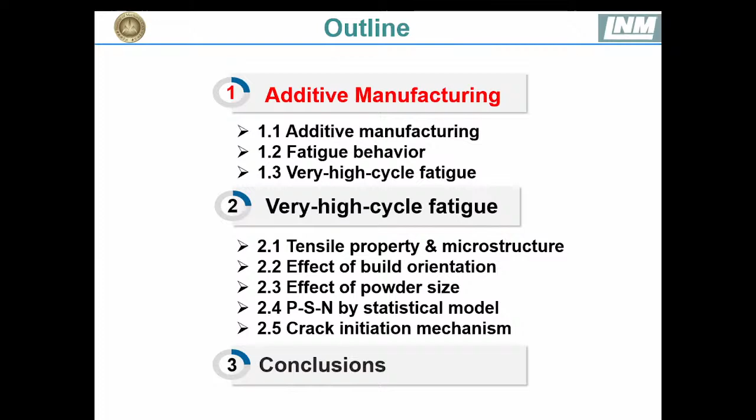As we all know, we are quite familiar with the additive manufacturing process. It is a layer-by-layer manufacturing process driven by three-dimensional CAD and based on the discrete accumulation principle. It has a lot of advantages compared to traditional subtractive processes, such as being a rapid prototyping process with short manufacturing time, the ability to manufacture and repair components with complex shapes, and high cost performance.

Therefore, over the last 20 years, it has been widely used in many industries, such as biomedicine, automobile, and aerospace, among other fields. However, there are also some disadvantages concerning additive manufacturing alloys.

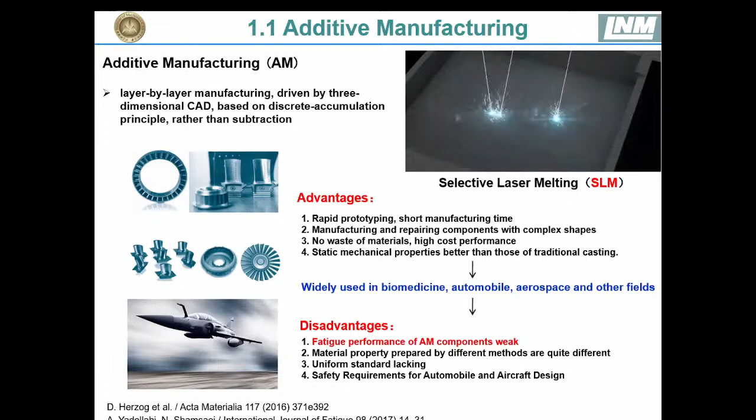One of the main disadvantages is that the fatigue performance of these components is quite weak compared to some others, because during solidification in the SLM process, some cracks and porosity could come out, and this is our aim, to perform a fatigue analysis for this alloy.

Concerning additive manufacturing, there are some scientific problems and also technological challenges, such as defects. There will be a lot of defects, and also the surface roughness of the components could be a problem, and also there will be some residual stress. The microstructure is not uniform, and some new model to predict fatigue life is also needed. And of course, there are also technological challenges, such as the powder characteristics, processing parameters, and so on.

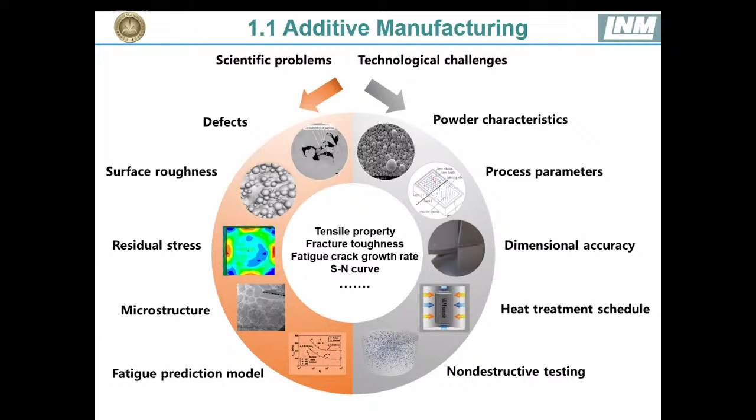Concerning fatigue analysis, our colleague collected some databases for two materials: one is titanium alloy, and the other is aluminum alloy. In these two alloys, we can see there are some factors affecting the fatigue behavior of these materials, such as surface treatment, surface roughness, and hot isostatic pressing, and also a comparison of the fatigue behavior for cast versus printed material.

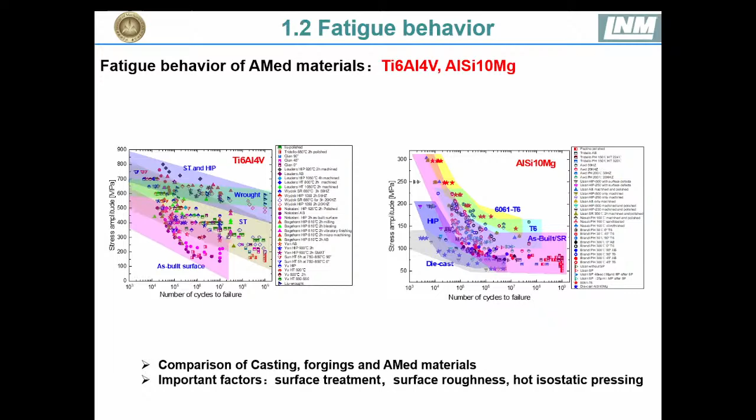Since there are a lot of important factors affecting this integrity, it is necessary to study some of these important factors, and also to develop some models to predict fatigue life. So that's the aim of our study, to study fatigue.

So why very high cycle fatigue? Well, very high cycle fatigue means the fatigue loading is beyond 10 to the 7th loading cycles. This is a new fatigue research area. It can be dated back to the 1980s, and it is important because the mechanism of very high cycle fatigue is different from high cycle and low cycle fatigue.

Normally the crack usually starts from the interior rather than the surface. The other important thing is that now a lot of new engineering components and structures, such as aircraft engines and turbine blades, and high-speed trains, are subjected to very high cycle fatigue.

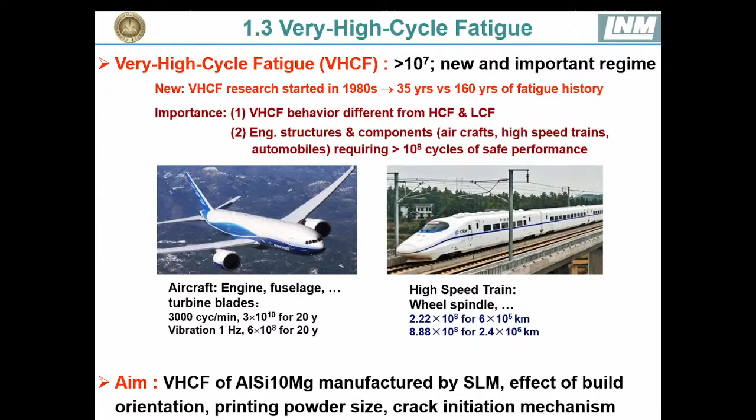So the aim of our study is to study the very high cycle fatigue of this aluminum alloy manufactured by SLM, especially focusing on build orientation, printing powder size, and also the crack initiation mechanism, especially the subsurface crack initiation mechanism.

As mentioned before, in our analysis, aluminum alloy is studied. The chemical composition of this aluminum alloy is shown in this table. This aluminum alloy is manufactured in three different directions: 0 degree build, meaning horizontal build, 90 degree build, and also 45 degree build.

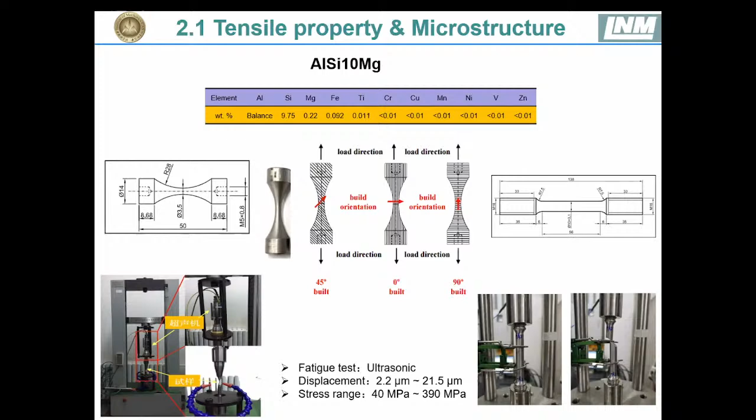The right picture shows the specimen for the tension test, and here shows the result for the tensile test. We can see that the build orientation has a strong effect on the yield stress, ultimate tensile stress, and elongation. The 0 degree build specimen has a higher yield stress and also a higher ultimate tensile stress than the 45 degree build and the 90 degree build.

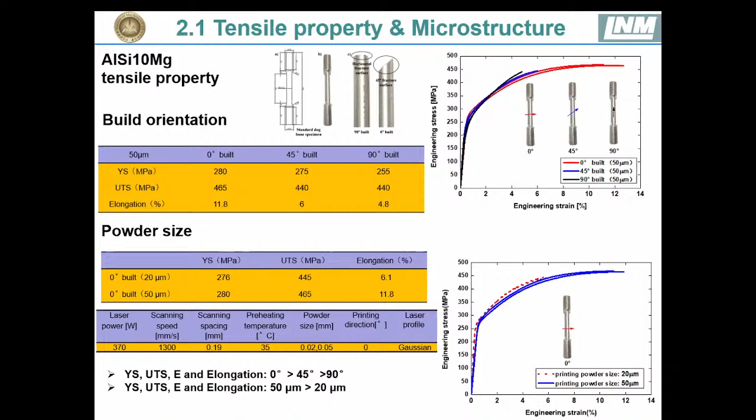The powder size also has a strong effect on the property. We can see that the specimen built with 50 micron powder is higher than that with 20 microns. The reason will be clarified later.

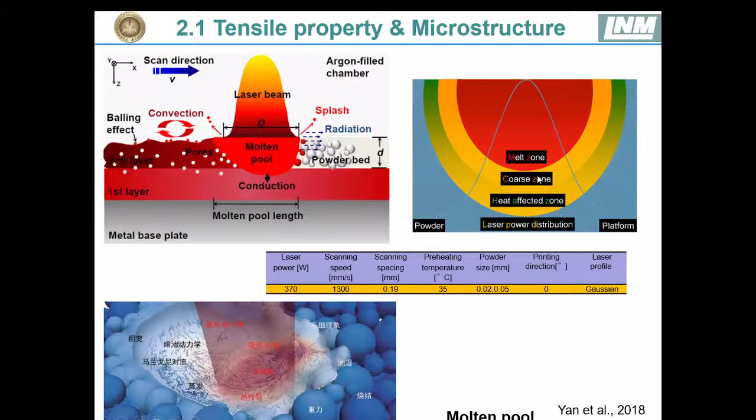We know that additive manufacturing is quite a complex physical and chemical process. There's thermal transfer and mass transfer, and due to this thermal gradient, a molten pool will easily form, because the temperature in the middle of the laser is higher than that at the border, and this will lead to a non-uniform microstructure, which will be presented later.

Due to this anisotropic microstructure, the microstructure is observed by optical microscopy from two different orientations. From this direction, we see a fish scale pattern, which is typically generated by this SLM process due to the thermal gradient. In figure B, we can see some molten pool here.

We can see that some molten pools are sometimes not continuous. This is because the laser sometimes can penetrate different layers and cause them to connect with each other.

And also with others, we can also see this non-uniform microstructure. And by scanning electron microscopy, we can further observe the microstructure.

We can see the microstructure includes 3 different zones: a fine zone, a heat affected zone, and a coarse zone.

And here the microstructure is a kind of cellular microstructure. It includes aluminum and also eutectic silicon is shown here in this structure.

And also it is believed that the silicon in the... please, Zoltan, sorry, Zoltan, can you mute yourself?

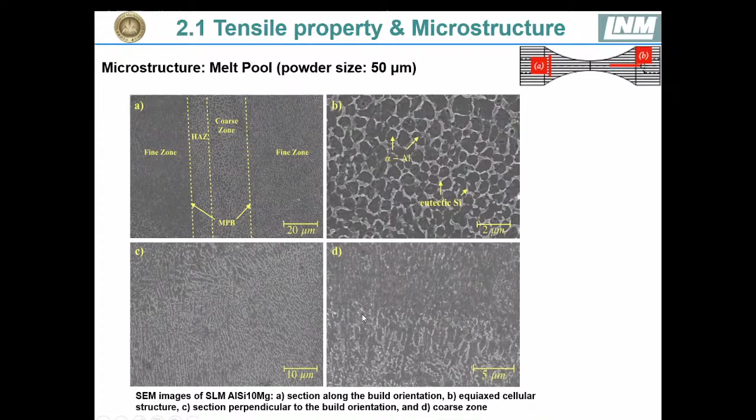And the microstructure is further observed using EBSD here from different orientations, from different angles. We can see that in the direction of the building direction, there are some columnar grains, formed due to the thermal gradient.

And in the other direction, we can see these equiaxed grains, which are formed quite uniformly. And also we can see a texture of 001 is formed due to this solidification process.

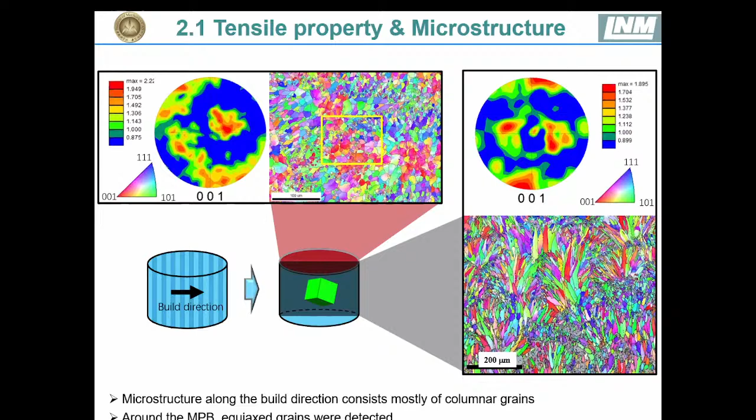And the microstructure is further observed. Here we can see that both columnar grains and also equiaxed grains were observed.

And also we can see some irregular grains, and some defects are shown, most frequently near the molten pool boundary here, as shown in this figure.

And also we can see the distribution of the grain size of this material here.

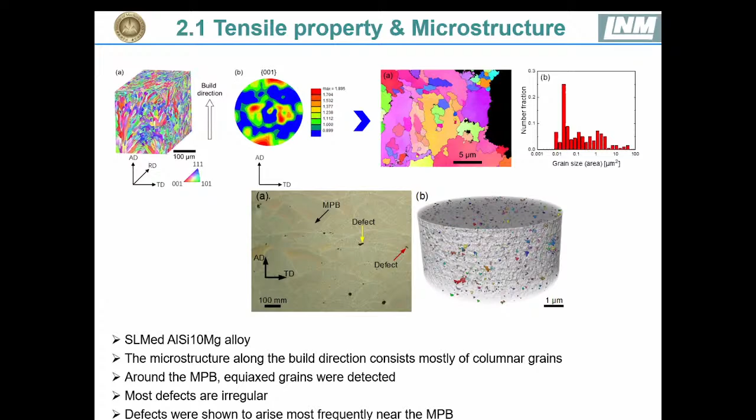And of course, the microstructure for the material manufactured with different powder sizes is also observed and shown in this figure. It can show the distribution of the defect size, and also the distribution of the grain size.

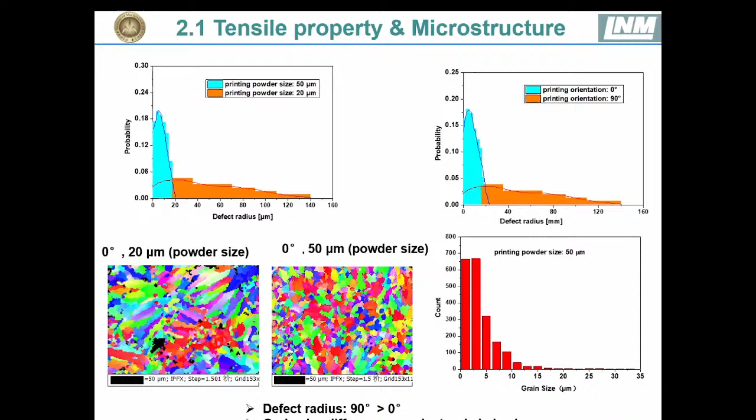And in general, the defect size of the specimen manufactured with 20 microns is larger than those with 50 microns, and the distribution from specimens manufactured at different orientations is also shown here.

Then we come to the very high cycle fatigue property of the specimens manufactured at different build orientations. From this figure, we can see that fatigue strength for the specimen manufactured at 0 degrees is larger than that at 90 degrees.

This is in agreement with the tensile property, which we showed before. And here we can see that the fatigue strength decreases with mean stress—this is the mean stress effect.

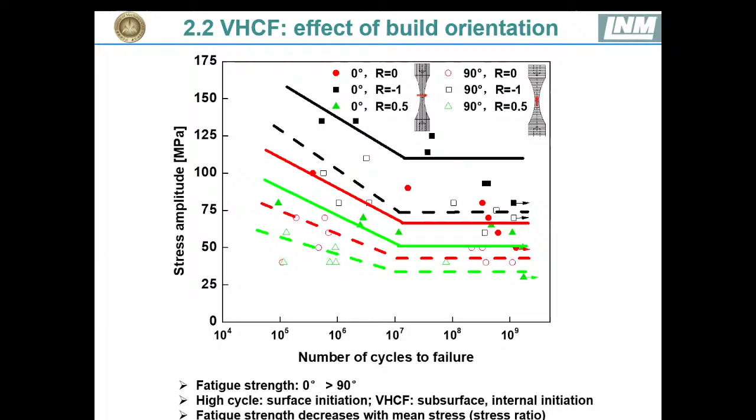This is also in general agreement with common practice, and both surface and subsurface, that is internal, crack initiation will be shown for these specimens here.

And the sphericity and the equivalent diameter of the cracks are also shown here. We can see that the sphericity of the defects decreases with the equivalent diameter, and most defects are ellipsoid shapes with equivalent diameter less than 40 microns.

And we can see that the defects in this material are also analyzed with the Gumbel distribution. We show these two distributions here in these figures.

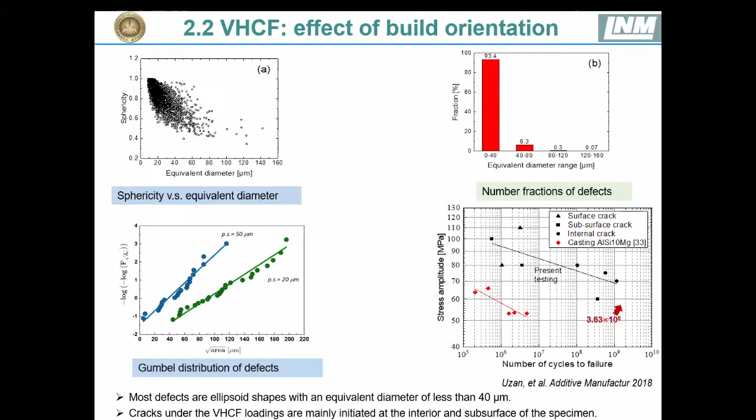And crack and fatigue properties for the additive manufacturing materials are also compared with those of castings. The specimen is shown here also in this analysis.

Then one question may arise: what is the reason for the effect of build orientation on the very high cycle fatigue? Why does the horizontal build specimen have higher fatigue and tensile properties than those built with 90-degree orientation?

One reason can be due to the molten pool shape. We know there are two molten pool shapes: one is layer by layer, where across different layers there will be several layers of molten pool boundary, and when the molten pool is parallel, they form track-by-track molten pools.

We can see when the molten pool boundary is parallel to the loading direction, the molten pool will be difficult to slip. On the other hand, when it is vertical to the loading direction, it will be much easier to slip.

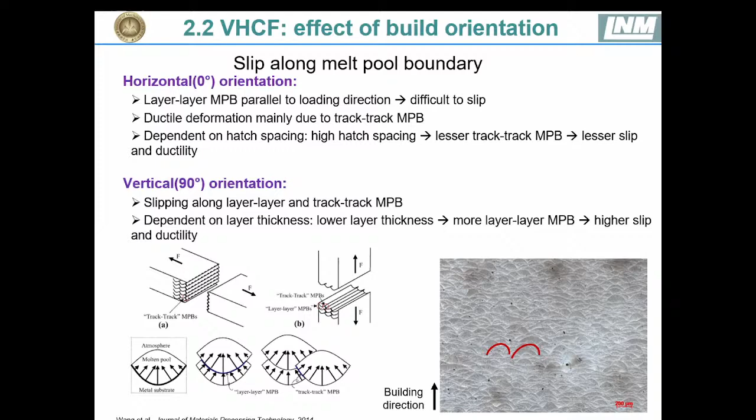So in this sense, for the horizontal orientation specimen, it will be much more difficult to slip, and it takes more energy, so the strength and the fatigue strength will be increased. On the other hand, for the vertical specimen, the fatigue strength is lower.

To be more specific, this figure shows the slip in the molten pool boundary. When the loading is vertical, we can see the molten pool will be much easier to slip. On the other hand, when the loading direction is horizontal, it will be much more difficult to slip.

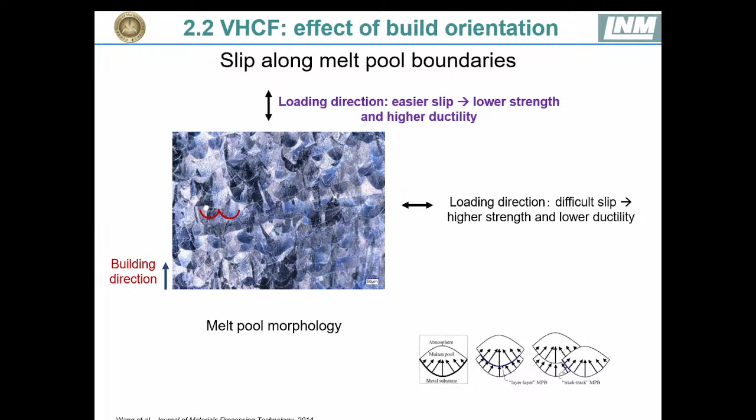This will lead to higher strength and lower ductility. This is one interpretation of the effect of build orientation. The other interpretation comes from the stress concentration effect.

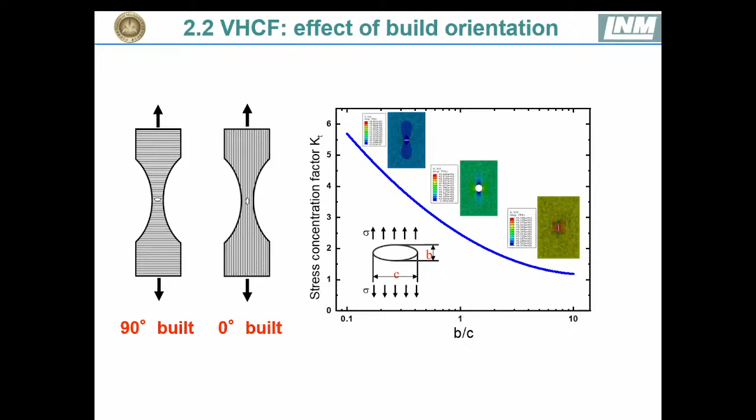For the zero-degree build specimen and the 90-degree build specimen, we see different morphology, and the stress concentration is different. We calculated the stress concentration factor and demonstrated the difference between them. For the 90-degree build specimen, the stress concentration factor is much higher than those built horizontally. This also explains the effect of build orientation on fatigue and tensile strength.

In addition, we also observe crack initiation using scanning electron microscopy. Five types of crack initiation modes are classified. One is crack initiated from the surface, which may be due to surface roughness or other surface features. Cracks may also start from subsurface or internal defects, lack of fusion, and pores, as shown in these figures. Also, cracks initiated from internal defects finally grow and form a fish-eye pattern, shown in figure C.

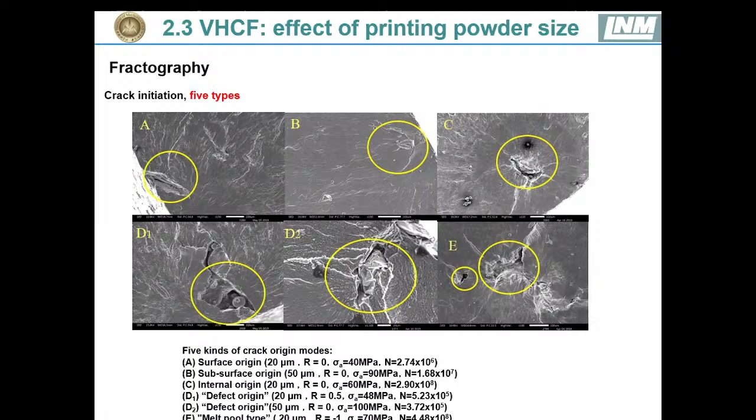We can also see that cracks may start from the melt pool, shown in figure E, and several multiple cracks could also be found, as shown here in figure E. These crack initiation modes are somewhat different from those in traditionally manufactured specimens. Fracture mechanics analysis will be used to study crack initiation and propagation.

Here we studied crack initiation and calculated the threshold stress intensity factor magnitude. We can see that the threshold for crack initiation is quite constant, corresponding to the threshold of the material, while in the propagation zone the threshold stress intensity factor increases with crack area. This means that mean stress may play a role in crack propagation.

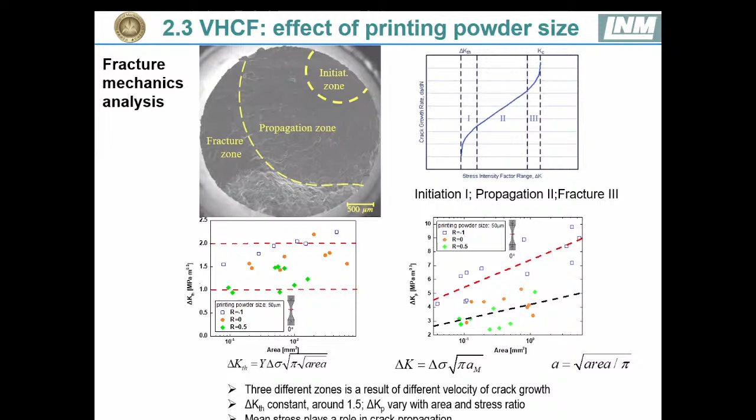In order to study fatigue strength, the Murakami model is used. This is a traditional and widely used model to predict fatigue strength. It correlates fatigue strength with Vickers hardness, the square root area of defects, and the stress ratio. For both surface and internal crack fatigue strengths, the Murakami model predicts quite well, with results showing good agreement with experimental results.

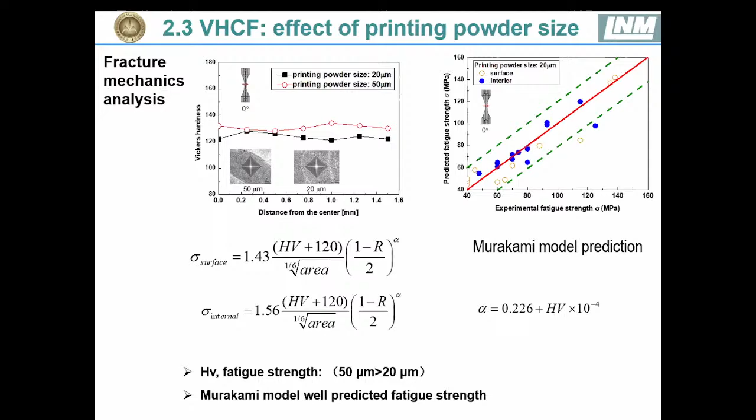In addition, a statistical model developed by our collaborators Andrea and Davide is used to perform statistical analysis of the SN curve. It assumes that fatigue life follows a log-normal distribution. From surface to subsurface crack initiation there is a transition, resulting in two curves, which can be modeled by assuming the mean value of fatigue life follows a log-normal distribution.

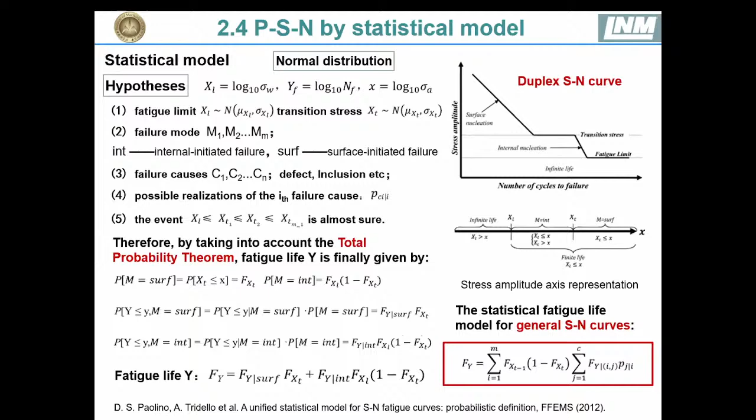This is also a function of defects in the specimen, and the defects are assumed to follow a Gumbel distribution. Once we have the distribution of defects, the fatigue analysis can be done. We assume a monotonic linear decreasing model for this fatigue analysis, and then the PSN curve is analyzed for different conditions.

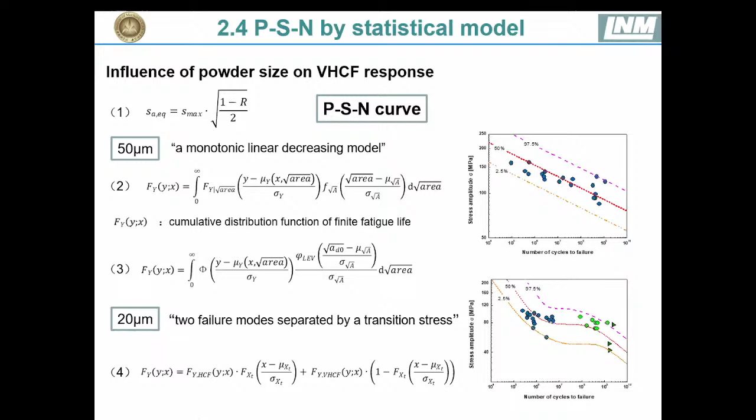The failure probability SN curve is clarified here, and if we consider two failure modes separated by a transition stress, a stepwise SN curve is shown here in this figure. We can also clarify the different failure probabilities from these SN curves.

Using this method, the PSN curve allows us to estimate the fatigue strength when the fatigue life equals 10 to the 9th loading cycles. Here we can see the distribution of the fatigue strength for the two printing powder sizes.

With this method, we can also obtain the result of fatigue cumulative failure probability with fatigue strength. We can see that as fatigue strength increases, the failure probability also increases. This is also in agreement with our common practice.

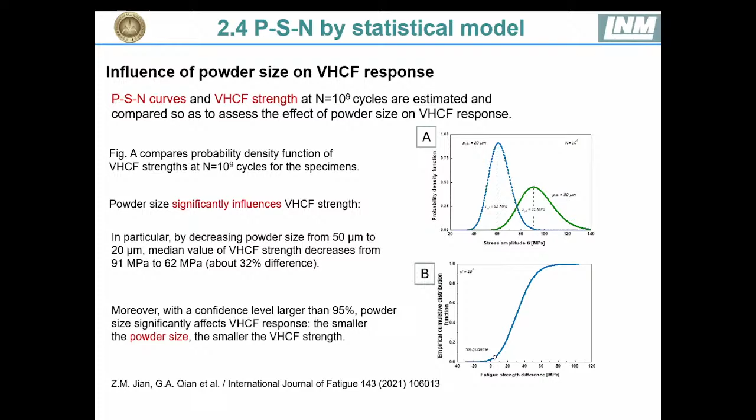In the next part, we will discuss crack initiation mechanism. As we know, crack initiation in very high cycle fatigue normally starts from internal cracks and will form FGA morphology. What is the mechanism of FGA? There are some discussions here, and one reason is assumed to be hydrogen, and there are also some other models.

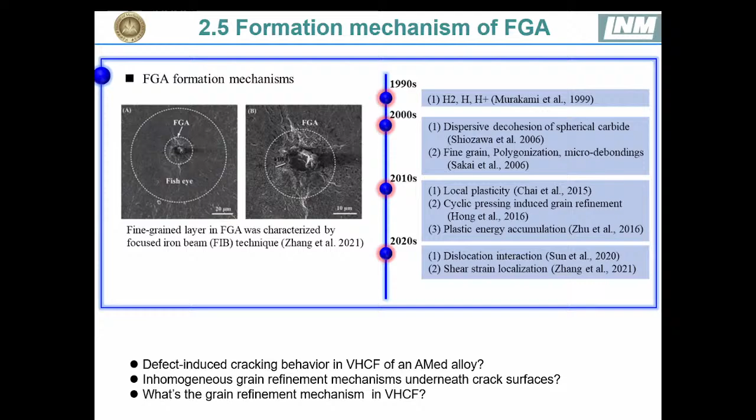According to my colleague Professor Hong, it assumes there's numerous compressive loading, and this kind of model is now widely used in traditional manufactured materials. However, for these additive manufactured materials, what is the mechanism, and what is the grain refinement mechanism in very high cycle fatigue?

We come to this crack initiation mechanism. According to this numerous cyclic pressing model, it assumes that the crack initiates, then crack contact occurs, and the compressive stress due to cyclic loading will, after some amounts of loading, cause grain refinement. This is now already validated by some experimental observations.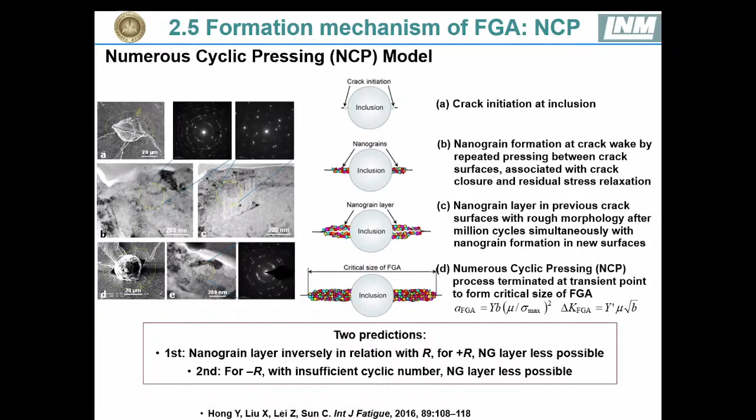Here in our analysis, also for this additive manufacturing analysis, we can observe some nanograin size at this crack tip and within the fish eye, within this FGA area here, as we show in our analysis.

We can also see that the crack initiated and mainly propagated along this melting pool boundary, and finally led to failure.

In order to validate the contact stress, we also use our model to study the contact stress between these two crack surfaces during high cycle fatigue.

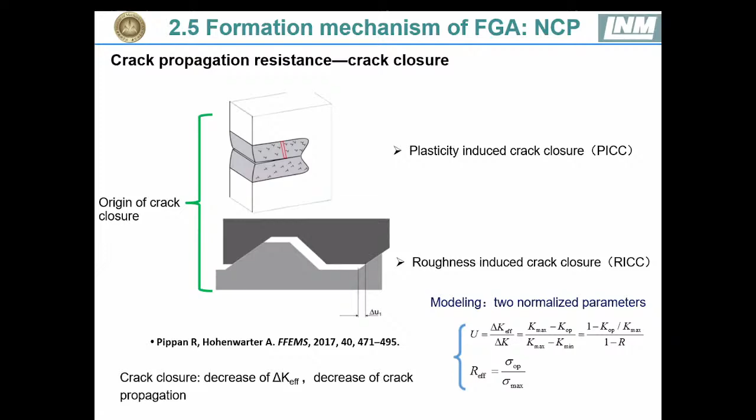Here we assume this plasticity induced crack closure, and we assume the nonlinear hardening material will be used to model this Bauschinger effect, and also used for building the nonlinear effect of the constitutive modeling here.

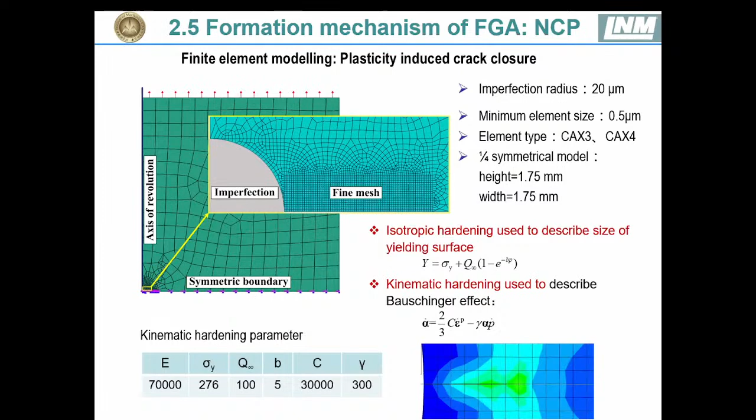Using this model, we ran several cycles and tried to analyze the contact stress, and we can see that the contact stress in the crack surfaces will increase with the decrease of stress ratios.

The contact stress is also quite high, and this high contact stress may lead to grain refinement. This partly validates the NCP model, that is, the effect of contact stress causing grain size refinement.

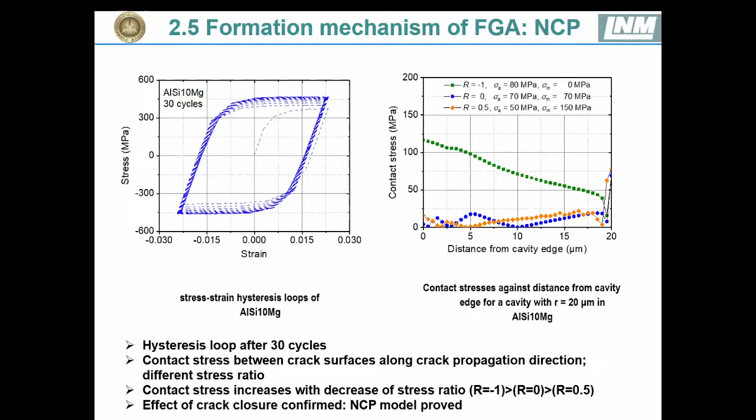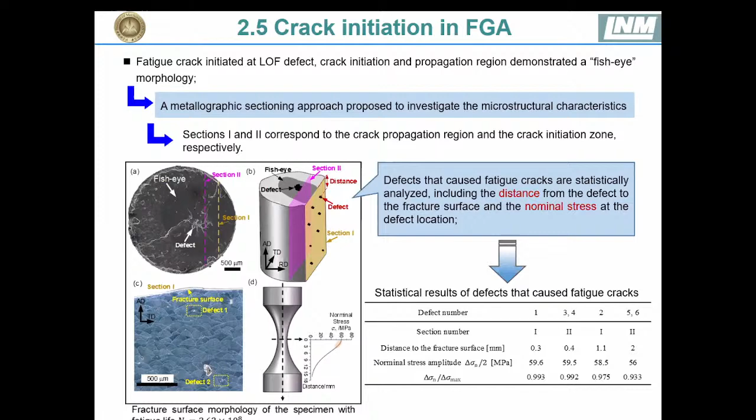In addition, the internal defect-induced crack is also observed here in this analysis, shown by SEM at different sections. We found some different cracks, secondary cracks, and also performed statistical analysis, which are listed in Table 1. Later on we will do some analysis on Table 1.

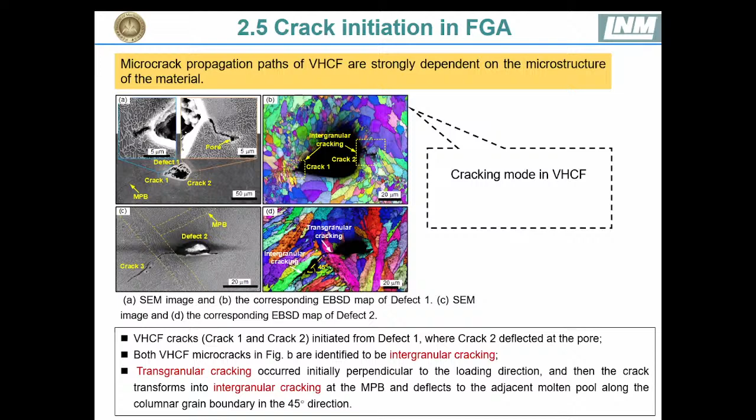There are also defects, there's also transgranular cracking occurring initially perpendicular to the loading direction, which then transfers to intergranular cracking in the melt pool, leading to 45 degree directions here. In figure 1, we show two defects near the melt pool boundary.

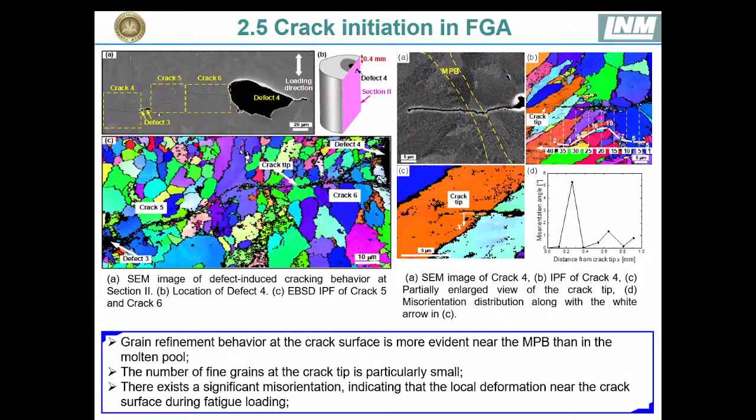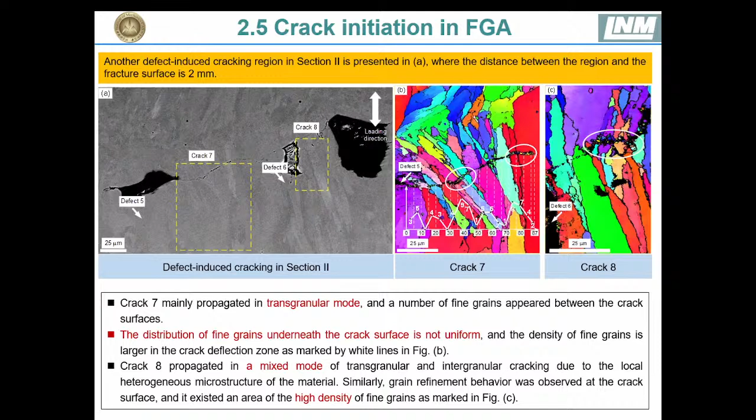In this pore, we also show some columnar grains around the cracks. It shows the fine grains have a higher local distribution in the marked area. Crack 8 is a mixed mode of transgranular and intergranular cracking due to the local heterogeneous microstructure.

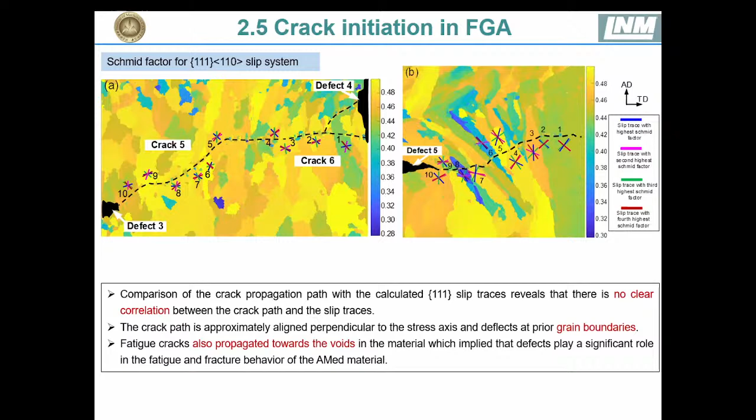Fatigue cracks also propagated towards the void in the material, which implied that defects play a significant role in the fatigue and fracture behavior of the AM materials here.

The grain refinement in very high cycle fatigue is also a new angle boundary formation mechanism. The misorientation angle between fine grains and the matrix is analyzed, and we can see there exists certain misorientation between the fine grains and the matrix grains. It is reasonable to believe that this misorientation exists, and the angle tends to be between 45 and 50 degrees.

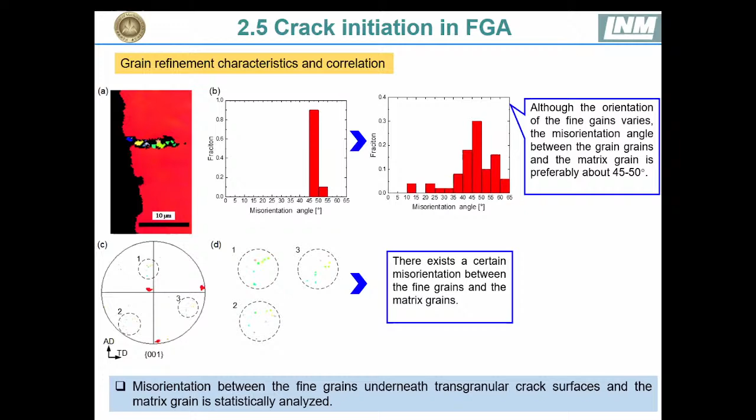The fracture surface after about 10 to the 9th loading cycles is observed by SEM, and this specimen is further observed by TEM and TKD.

The figure on the right shows there's a fine-grained layer near the crack surface, and significant misorientation was also observed in the fine grains. This indicates that the activation at this location is the result of coordinated plastic deformation, and dislocation activations form subgrain boundaries lead to misorientation. As plastic deformation accumulates, dislocations pile up, causing the formation of large angle grain boundaries.

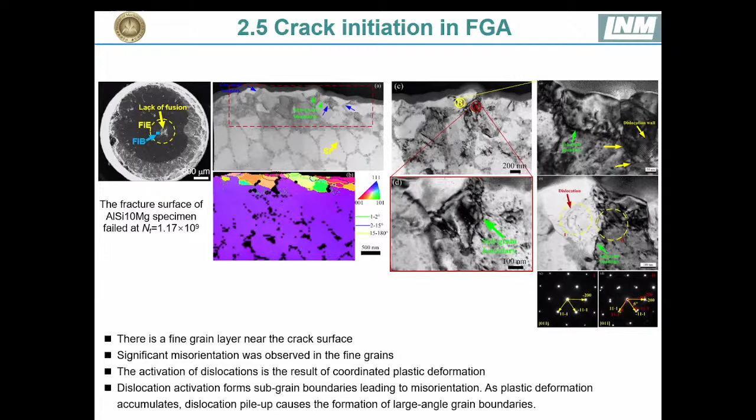This shows the crack initiation mechanism, as well as the formation of the fine granular area in very high cycle fatigue. So from what we've discussed, the following conclusions are drawn.

Firstly, the build orientation has a great effect on the mechanical and fatigue properties of these additive manufacturing alloys. The horizontal manufacturing specimen has a higher strength than the 90-degree manufacturing specimen, and 50 micron printing powder size leads to a higher fatigue strength than that of 20 microns.

Five different kinds of crack initiation modes are identified, and a statistical model is used to perform P-S-N study. As a result of heterogeneous microstructure, intergranular cracking induced by incomplete fusion defects is the dominant failure mode.

We also stress that numerous cyclic pressing (NCP) is the dominant model to induce grain refinement, and the heterogeneous distribution of refined grains underneath the crack surface is strongly related to the printed microstructure and the crack propagation path. With that, thank you very much.

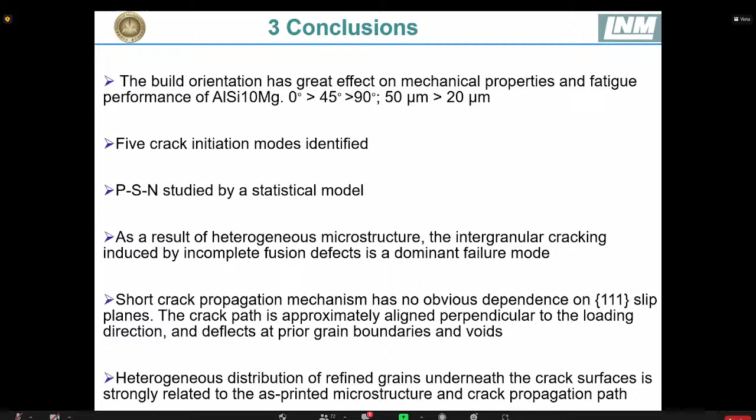According to your results, it seems that the defects are most critical. Do you see ways to modify the process in order to reduce such defects? Meaning, changing parameters or modifying the SLM process in order to get rid of some of those defects?

Yes, especially in very high cycle fatigue, because when the loading cycle is longer, defects play a more critical effect on the fatigue behavior. In very high cycle fatigue, small cracks and also some cracks in the interior of the material will function. Small internal cracks, and also porosity and lack of fusion, will start to initiate, and even multiple cracks will initiate simultaneously, leading to coalescence and failure. That's our experimental observation. So I totally agree with you that defects are very critical in the very high cycle fatigue behavior.

Let me add. Okay, the work is about the analysis of the experimental and numerical behavior of lattice structures manufactured through AM processes. The aim of the work was to select the best performing lattice cell among 5 possible structures, and then to implement an efficient numerical model to predict the behavior under compression, quasi-static tests, and also impact tests.

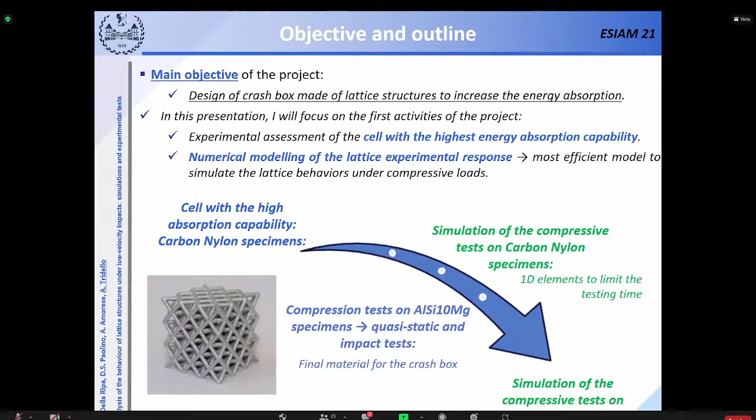The first validation and numerical prediction was performed with carbon nylon material, produced with this Ultimaker manufacturing equipment. We then ran quasi-static compression tests and also numerical models, and we found that the best choice for the lattice cell was the lattice cell number 4.

The prediction with numerical models was quite good and also efficient, since we simplified the model by using 1D elements and an elastoplastic behavior. We got a very good agreement between the quasi-static compression tests on the cell and the numerical model, as for the force displacement curve and for the failure modes, as visible in this slide.

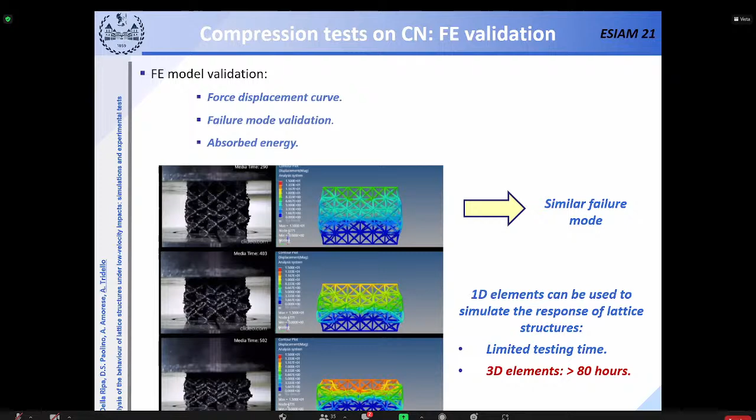Then we decided to implement the cell structure with an AlSi10Mg alloy made through SLM. We had to slightly modify the model to add another constraint to the failure mode, to get an acceptable agreement between numerical and experimental behavior under quasi-static compression tests.

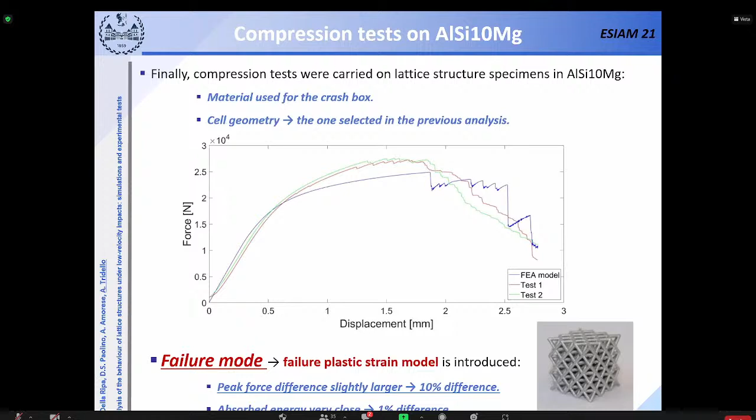Then we ran impact tests on AlSi10Mg specimens, and we found that a significant strain rate effect was present, and this had to be also modeled to correctly predict the maximum impact absorbed energy.

The final results were quite good in terms of final values of absorbed energy, but the shape of the curves is not so in agreement. This is why further developments are necessary for the model to correctly predict what happens with AlSi10Mg metallic alloys, and this is the further development we are pursuing.

To conclude, I think that what I said is already present in the conclusion. Thank you.

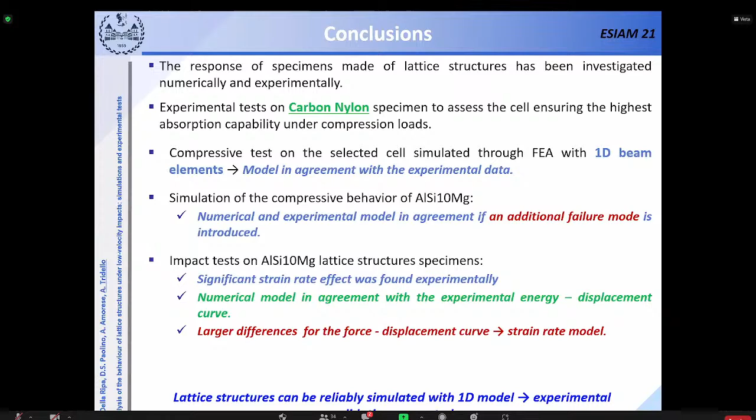The work was really nice, and also the part where you showed the verification of your numerical simulation, it was quite nice and quite matching. I was wondering, for the mechanical properties that you put as input in your model, how were they calculated?

Yeah, we ran quasi-static tensile tests on specimens in carbon nylon, and we got the stress strain curves, and then we implemented the real curve, the actual curve, in the model, so that it's a specific model for that carbon nylon specimen and material. This, in our opinion, was the best way to catch the complete behavior. We didn't model the anisotropic behavior of the carbon nylon, but we got good results in terms of modeling.

This is why we didn't get too much into the detail in modeling the material behavior. Usually when fabrication is done properly with good infill, anisotropy is quite limited in different directions when printed with FDM. How about the dimension of the specimen that you tested? Because these lattice features are quite small.

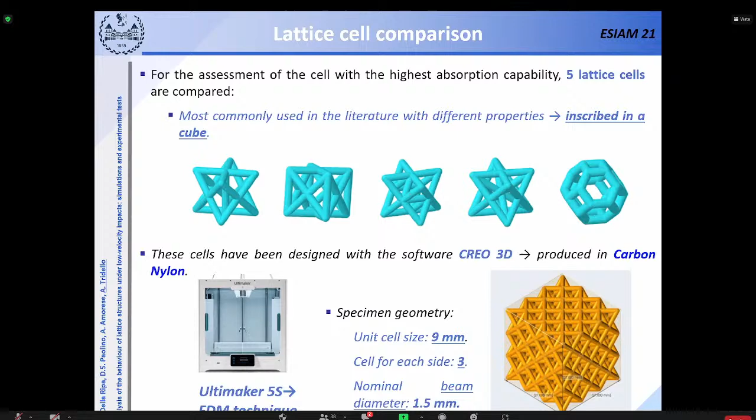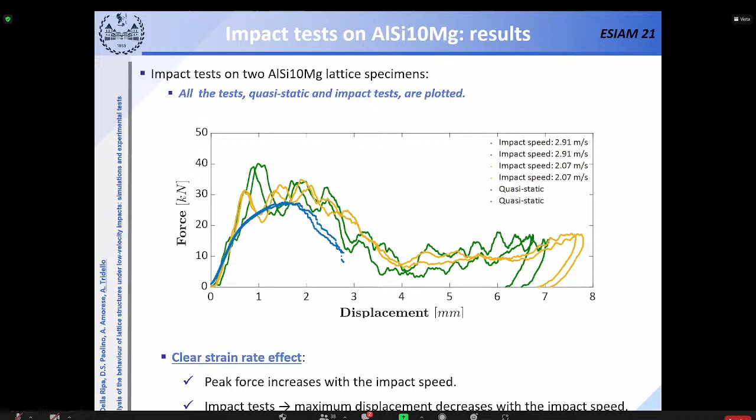And the last question: how about the material properties when it comes to rate dependency? Did you perform any more testing to get the material properties? We ran tests at three velocities, with 2 repetitions each, and put in the model, in the Johnson-Cook model, the values we got with these three values of velocity. Finally we got something in quite good agreement in terms of absorbed energy, but the part related to the aluminum alloys has to be developed a lot, since I cannot say we got good results in terms of modeling.

So for material properties, you repeated the tensile testing but at different speeds. Okay, yeah, perfect, thank you so much.

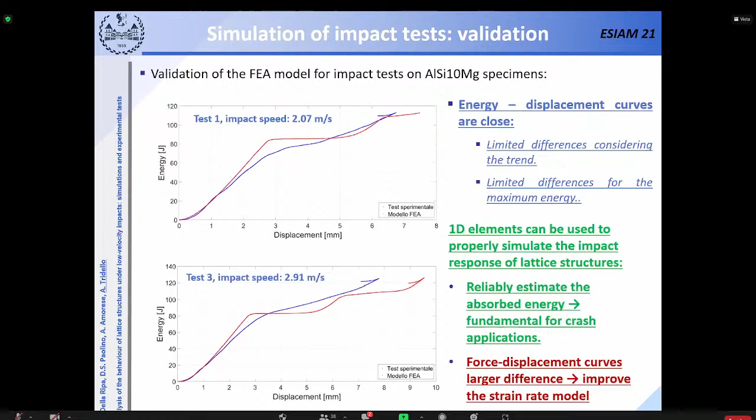The title for the next presentation is Fatigue Assessment of Laser Beam Welds between AlSi10Mg AM-structures and conventionally manufactured aluminum, by local approaches. The research is presented by Mr. Benjamin Möller.

Good morning everybody. I also prepared one condensed slide which I'd like to share. So if you can see my screen now - this work starts from the question: what happens if we join additively manufactured materials, in this case aluminum-silicon-magnesium, with conventional aluminum materials, which we might use for larger structures in the automotive industry, for example.

So therefore we set up an experimental and numerical test program using lap joints, which are laser beam welded between additively manufactured material in the upper part and conventionally manufactured aluminum 6082 in the lower part. We had a test program with fillet welds and welds which run through the two materials.

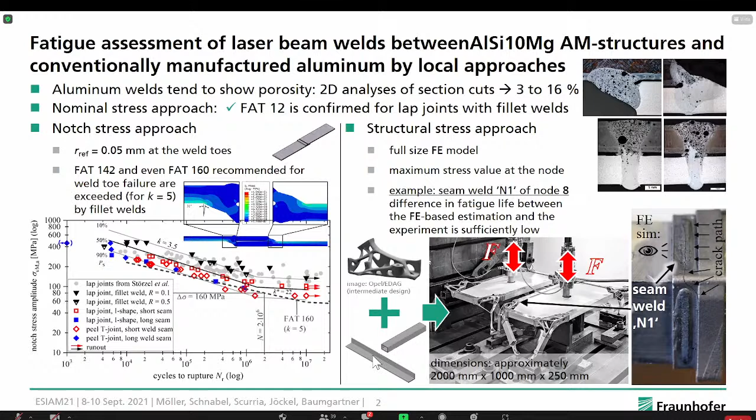In a second step, there was a so-called battery carrier, used in the automotive industry for electric cars, as a component where additively manufactured connection nodes are welded to conventional aluminum sections. This was tested under biaxial loading conditions comparable to the application. In these experimental investigations, we found cracks in at least 3 out of 7 experiments, running through the laser beam welded seams, causing failure of these more or less complex structures. From the numerical point of view, the notch stress approach is not applicable due to these full size models, so a structural stress approach had to be chosen, which was in good agreement for the whole battery carrier to estimate the fatigue life of such a weld seam.

Yeah, this is more or less the outcome of the work, and I think there is still some work to do. So thank you, and I'm open for questions.

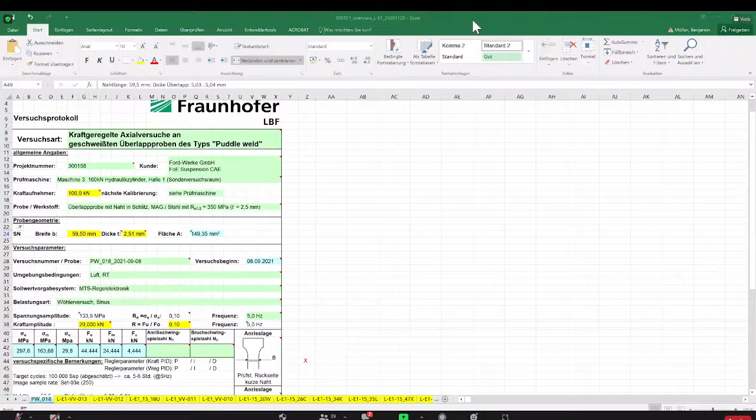Thank you for your presentation. It indeed has been a topic of research lately about welding these complex parts that we fabricate with AM to the conventional part, because usually we don't need to fabricate the whole component by AM. So it was quite interesting to see your finding. Let's see from the audience, is there any question?

Okay, I have 2 questions. One is about the defects you saw, the internal porosity. In the presentation, you mentioned that these defects are more in the welded area closer to the AM part, and as the cause, you mentioned it's because of remelting of the AM side of the joint. Why do you think these large defects are created when the AM part is being melted, but not when the conventional part is melted?

Yeah, we did a little study on this, trying to decrease the large pores and porosity in this area by preparing the sheets in advance of welding, through etching and mechanical removal, in order to try to get rid of the oxides which might come from the outside. But obviously this was not the main reason why we see this porosity, so from our point of view, the reason has to be inside the AM material. We think the porosity which already exists in the AM material, due to the additional heat input, causes this extension of pores and porosity.

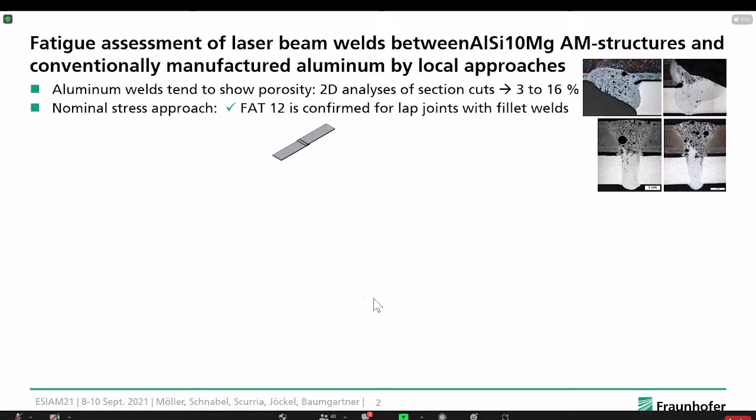Yeah, we also made some trials on this, and we have seen that we got more problems, let's say, changing or flipping this around, since the conventional 6082 material is also not too easy to weld, so we struggled with this material when we flipped it around. So this was the more practical choice in this case.

So we have cracks in case we flip it around, or more tendency to have cracks in the conventional material? Okay, yeah, thank you.

And sorry if I interrupt, can I ask a second question? After the welding, the laser beam welding, do you apply any heat treatment on this stacking of the two plates? No, after the welding there was no heat treatment. We had a heat treatment in advance for the AM material, which was the stress relief heat treatment, and for the conventional one it was a T6 heat treatment. But afterwards, there was no heat treatment performed.

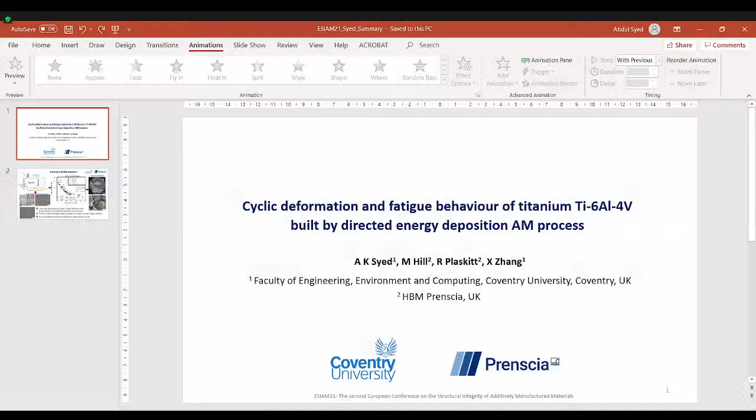Hi, hello, good morning, everyone. Can you hear me clearly, Jawad? Yes. Yeah, please, thank you very much. Introduction. Yeah, okay. Thank you very much for the introduction.

Today, I'm going to present strain control fatigue behavior of titanium alloy Ti64 built by wire and arc additive manufacturing process, which is a directed energy deposition AM process. As we all know, application of AM built materials in heavily loaded structural applications always needs to be assessed under cyclic loading conditions. Therefore, we focus this research mainly on understanding the strain control fatigue behavior of wire arc Ti64 built materials.

So this is just showing a summary of the overall research we have conducted. We have used a wire and arc additive manufacturing process with Ti64 as raw material. And we build these materials using an oscillation build strategy developed for this process. So basically, in this oscillation build strategy, you could actually oscillate your wire and the torch along the wall thickness direction, where the travel direction is along the wall length direction.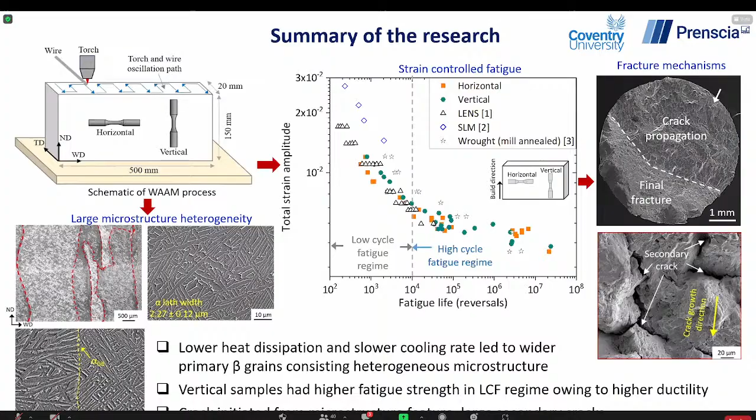The material was fabricated with wire arc additive manufacturing, and this technique, same as other AM techniques, would result in residual stresses in the component. I didn't quite find any info regarding the residual stress in the samples that were studied. Obviously, all the mechanical properties you're observing now are not only related to the microstructure—there is a part that is the effect of the residual stress. What is your opinion? What do you think is the state of the residual stress in the horizontal and vertical cases, and in which case can it be more dramatic?

That's a good question, Jawad. We actually did a parallel program to understand the residual stress behavior when we remove the wall from the substrate, and also after extracting some dog bone samples and compact tension coupons for the fatigue crack growth testing. We observed that after extracting these small samples, around 10 millimeters in diameter, compared to the size of the wall which is 500 millimeters, there are very low residual stresses, actually very close to any technique's resolution—for example, around 10-15 megapascals in terms of the overall residual stresses.

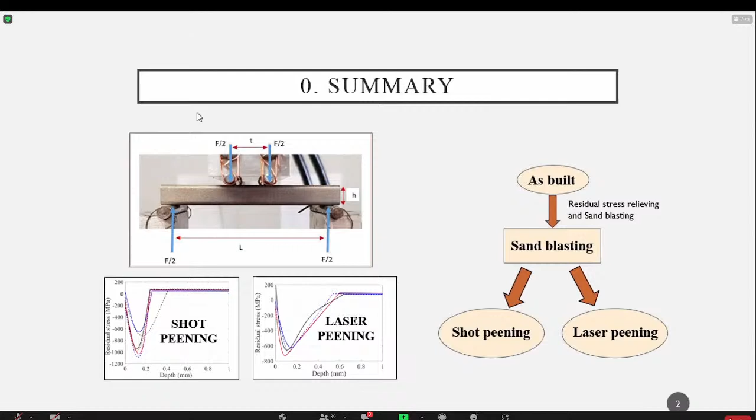You can imagine the complete evolution of the crack as emanating at the periphery of this internal defect, then growing in an internal elliptical way until it touches the free surface of the specimen. Then it becomes a superficial crack and keeps growing until it reaches final failure.

In all that evolving process, we saw 4 different regions in this fracture surface. The first one, surrounding the very first 300 microns around the defect, is labeled A, and it's a very microstructurally textured region. You can clearly see how the crack evolves following the acicular martensitic structure typical of these titanium alloys.

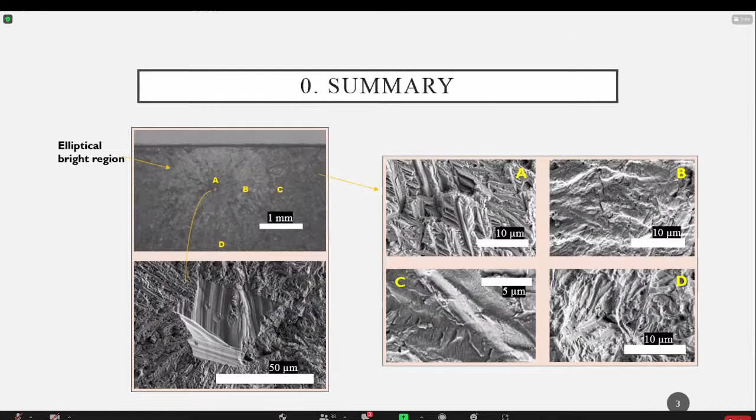We think it is significant, and we found this pattern in all the specimens that we analyzed. So it's interesting to go deeper into the defects.

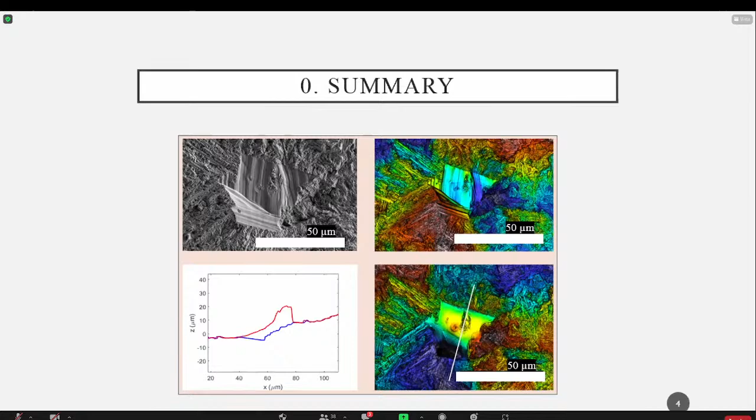This is a very curious example because we usually label defects into 2 different types: crack-like if they are very sharp, or blunt. But in this case, we see a combination of the 2 situations.

After analyzing the defects that caused the failure, we tried to build a numerical simulation model to obtain the same results we saw experimentally, but numerically. If you have any questions about it, we can discuss it as long as you want. So that's all for me.

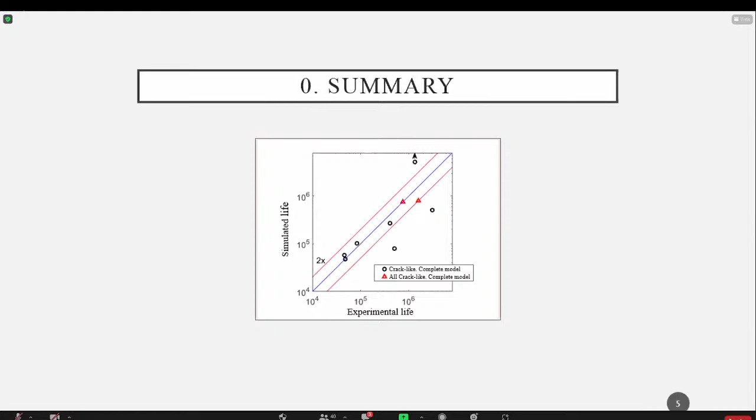Yes, indeed. I can show you a few more examples, because this is the example we saw right now, but I brought you here another one. Okay.

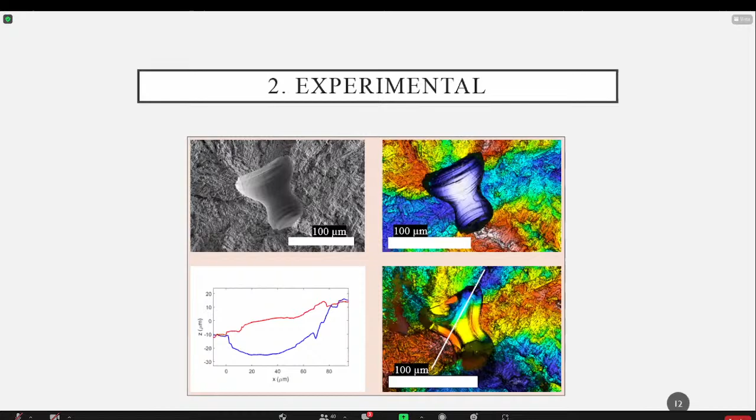This is clearly a blunt defect. So we applied the model to both situations, and the model is composed of two different parts. For defects considered crack-like, very sharp, we didn't consider the initiation - we assumed this defect would behave as the initial crack and start propagating right away. But for blunt defects, we did include this initiation. After all the simulations, we came to a conclusion I can show you here.

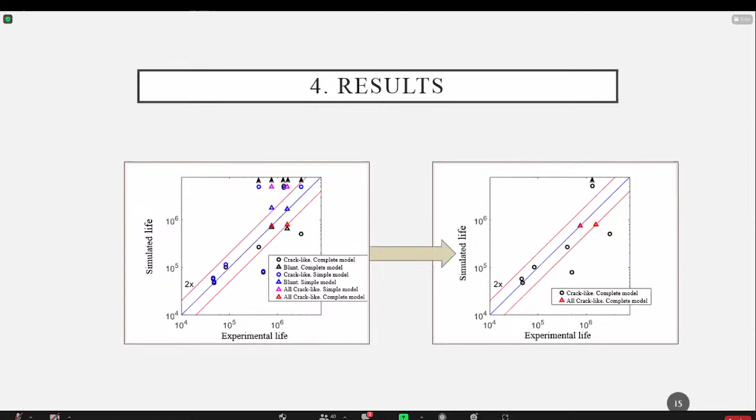Okay, thank you. There is a question from Mr. Harry Siho. Yes, please. I want to ask two questions to Giovanni. The first one is: your prediction approach is fracture-based?

Yes, it is. And we integrated a Paris-type crack growth law. How did you model the defect? And secondly, what's your method for modeling the defect? So the defect has a very irregular shape, obviously, so it's very hard to model it right away.

So we made the assumption that it was close to an ellipse. We measured the area of the defect and obtained a rough estimate of the aspect ratio, then modeled an ellipse with the same area and a similar aspect ratio. We calculated the stress intensity factors using a weighting function methodology, which is important because we have a bending setup, so the tensile stresses are not constant in the section, and we also have residual stresses. We used this weighting function methodology to calculate the stress intensity factors at critical parts of the crack, so we can see how every part of the crack grows in different directions, and how the shape and aspect ratio change.

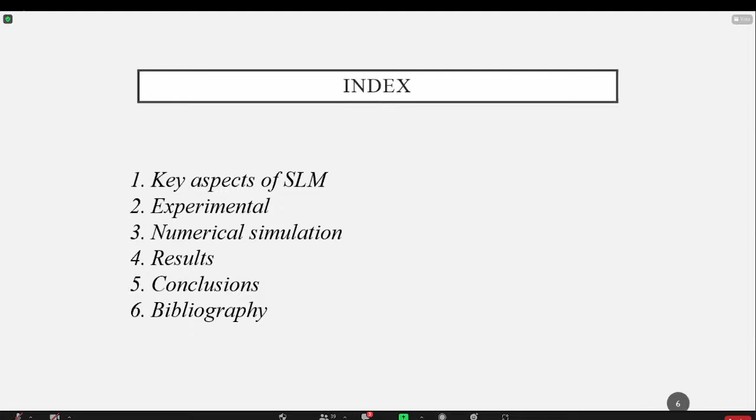We found a few papers in the literature specifically related to additive manufacturing. Okay, and they calculated the constants for this equation? Yep, exactly. They should be at the end in the bibliography. I don't think they're there, but they should be.

Thank you very much for your presentation. Excuse me, just one more question, because I got it right now. Your model is independent of any R ratio? Sorry, can you repeat please? I mean, your fatigue life estimation model is irrelevant of any R ratio - you can use it for R 0.1 and R 0.2.

Yes, we included that in the model because this changes, well first of all, the crack closure - that is a very important effect in our simulations. So it depends on the R, the load ratio. So yeah, this was included.